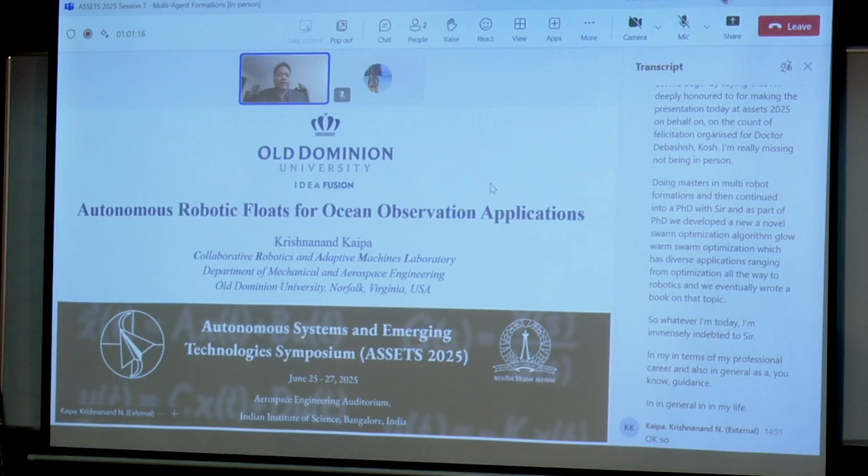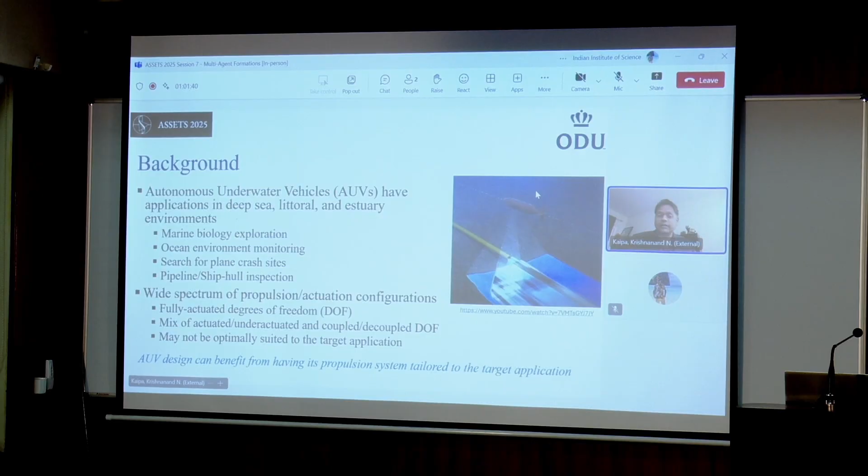Okay, so today's talk is focused on some of the recent work we did in my lab on the topic of autonomous robotic floats for applications in oceanic observation. To give some background, autonomous underwater vehicles have diverse applications ranging from deep sea, littoral to estuary environments, such as marine biology exploration, ocean environment monitoring, search for plane crash sites, pipeline and ship hull inspection tasks.

AUVs come with a wide spectrum of propulsion and actuation configurations, ranging from fully actuated degrees of freedom to a mix of actuated, underactuated, and coupled, decoupled degrees of freedom. One limitation of such complex configurations and actuators is that these traditional AUVs may not be optimally suited to the targeted application. Therefore, design of an AUV can benefit from having its propulsion system tailored to the target application.

My talk today is focused on floats, which represent a specialized class of surface and underwater vehicles deployed in different marine environments, with mobility ranging from passive drifting with ocean currents to active buoyancy-controlled vertical scaling of deep water columns. These floats come with a variety of onboard sensing to autonomously monitor and collect essential data like conductivity, temperature, turbidity, depth, dissolved gas levels, etc., with wide applications in oceanography and climate science, like methane seeps exploration, harmful algal bloom tracking, subsurface current observation, biological monitoring, etc.

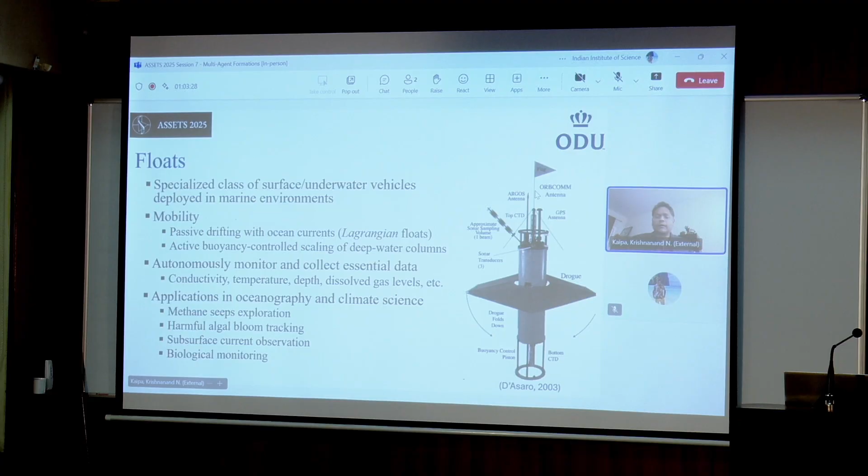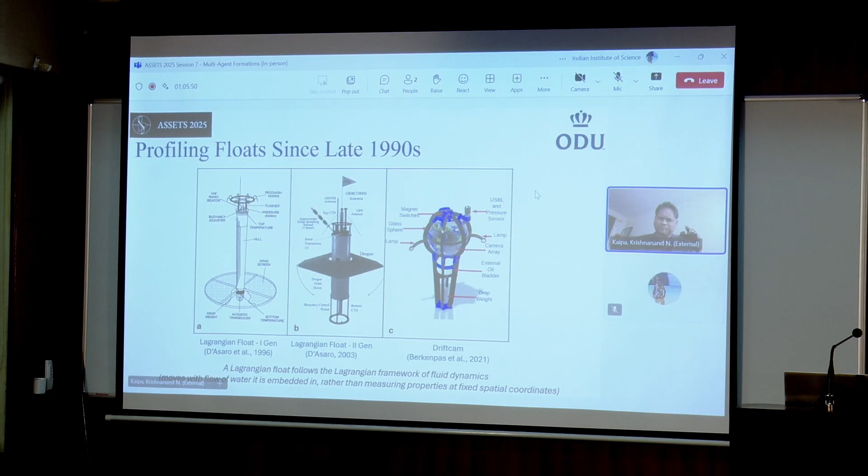In our work, we are specifically focused on the application of methane seeps exploration. Methane seeps are locations on the ocean floor where methane gas escapes from the reservoirs underneath the seabed into the surrounding water. And study of methane seeps is significant in marine science because of the impact they have on different oceanic and atmospheric processes.

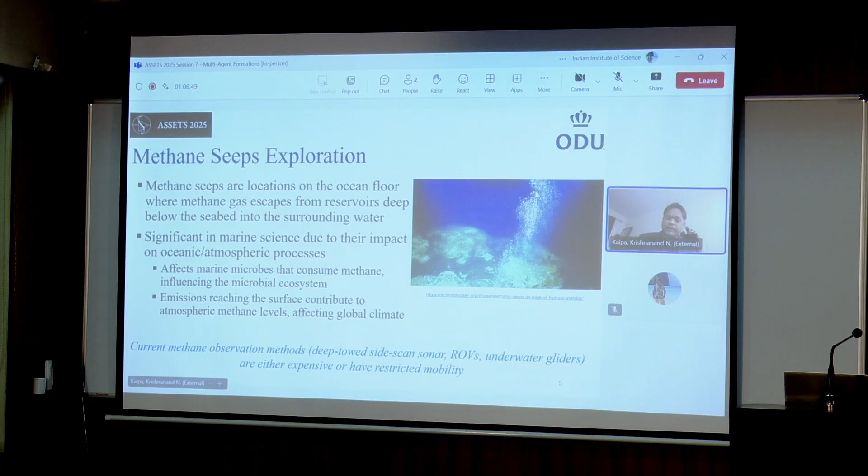For example, they affect the marine microbes that consume methane, influencing the microbial ecosystem, and any methane emissions reaching the surface contribute to the methane levels in the atmosphere, in turn affecting the global climate. Current methane observation methods use deep towed side scan sonar, ROVs, underwater gliders, which are either expensive or have restricted mobility.

And some of the requirements in the application, you can see how they impose the need for precise motion control in the vertical dimension while affording minimal to nominal motion demands in other horizontal dimensions, and also allowing for a systematic progression of prototyping iterations.

The mobility platform that we initially designed was meant to operate at shallow depths, although we envision in the near future a final deployment, which will be offshore along the US Atlantic margin, approximately 90 miles east of where we live here.

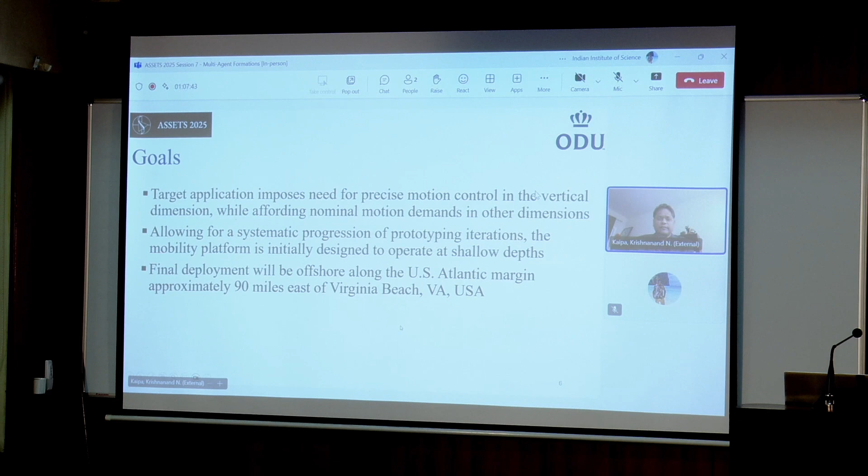In contrast to the traditional floats, you can call this more like a hybrid float because it combines features of a Lagrangian float and a quadrotor type of platform, which is achieved using 4 electric motor propeller-based thrusters that are aligned along the vertical heave axis. And it has a pressure sensor mounted on the float to obtain depth feedback, combining all these to do precise, accurate depth tracking using a PID controller that is implemented on board the float.

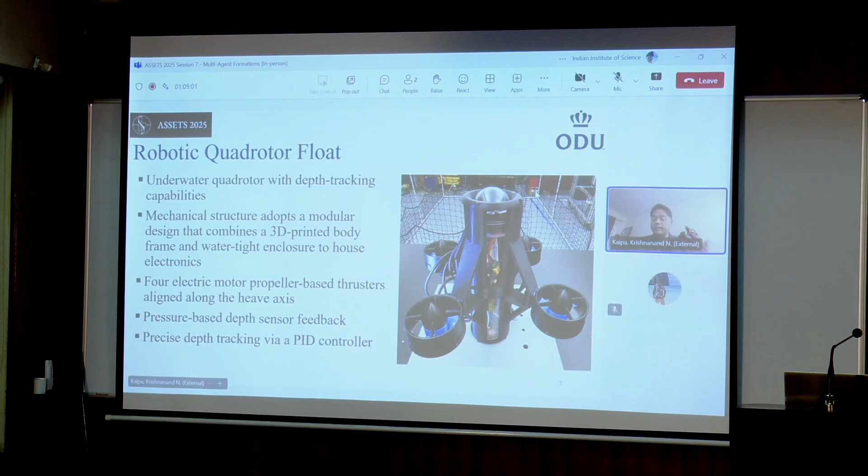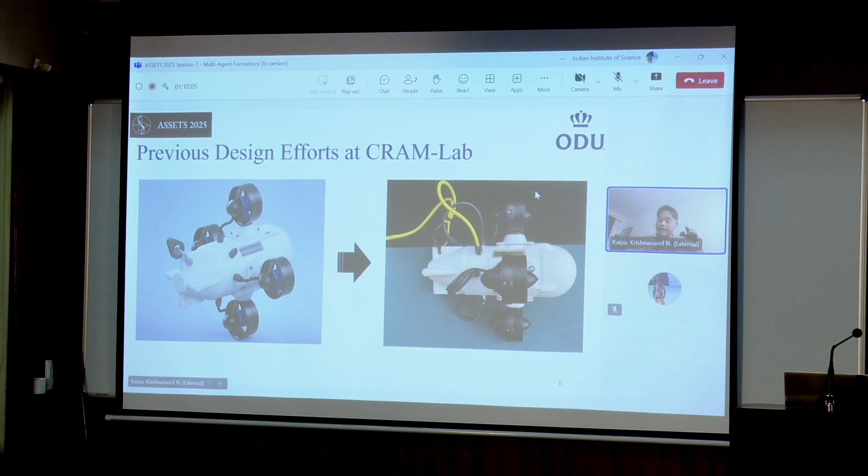So these are some of the design details, and all these designs were carried out by senior design undergraduate students as a part of a capstone project, while taking some minimal guidance in the design process.

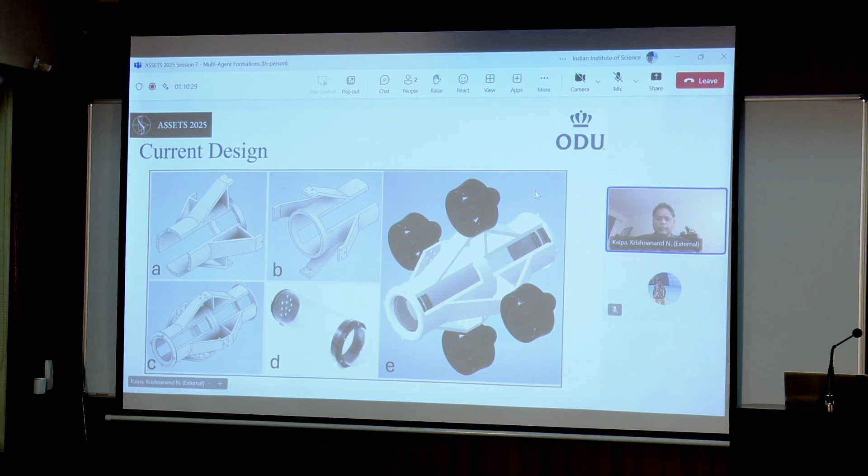So these are some hardware details. At the heart of the hardware is a Raspberry Pi, which is doing all the processing and implementing the PID controller, taking readings from the depth sensor and sending commands to all the thrusters through these ESC motor controllers. These thrusters are brushless motors, so they need dedicated speed controllers.

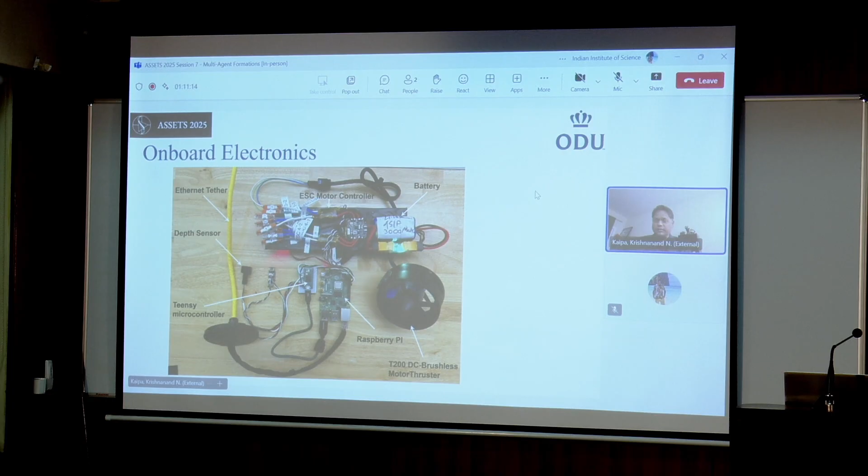And you can see a tether was going all the way. It had an onboard battery, but sending the basic commands to the bot was through a tether. And a Simulink-based coding of the PID controller was achieved and downloaded onto the Raspberry Pi. This reduced the coding challenge for mechanical engineering students.

I can go into more details later, and this also allowed real-time gathering of the data and also changing the PID parameters on the fly.

In terms of testing environments, we initially did some basic mobility testing and also tested the waterproofing in a storage tank that we bought, just filled it with water and did some mobility testing. And then we took it to the deep water pool that we have at the university and did more rigorous testing. And then we also took it to an outdoor lake for some preliminary experiments.

So we presented this work last year at the Oceans Conference, which is focused on all research related to oceans. So I'm going to play this video, which is self-explanatory, and later maybe I can touch upon certain things, certain gaps in the video. I'm going to disable that now. Okay. Sitting out of the water.

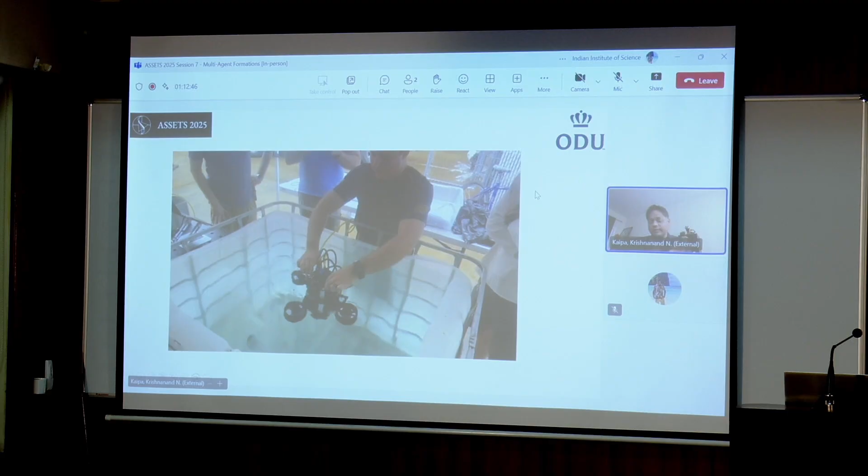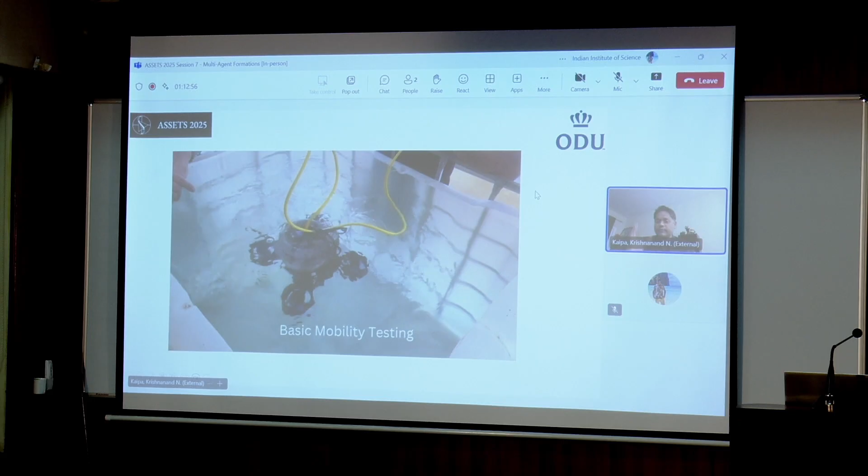As I was mentioning, these were our initial testing phase, where we had to achieve a balance between the CG and the center of buoyancy. So it had passive stability. And then just using one pressure sensor, we were able to do depth tracking. And that's the response to different step inputs and staircase inputs we were giving to the float.

And one of the students was a scuba diving instructor, so that came in handy while doing these experiments. So as you can see, we were providing a sinusoidal reference of depth, and the float was tracking such a reference signal in real time.

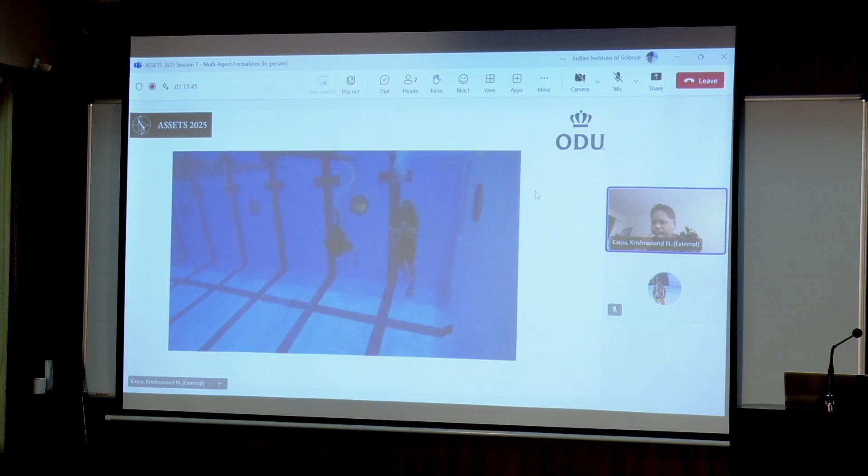The current platform has capability to go up to like 100 meters below water. And one of the requirements is to stay on the bottom of the seafloor. So we tested some kind of mock, so it was resting on the floor for up to 15 to 20 minutes. And then we made it resurface.

And you can also see how we went after a symmetric design in order to enable modeling of the platform for controller development purposes. We had some challenges in the outdoor environment. Any small currents would drift the bot horizontally. So there's a lot more work to do.

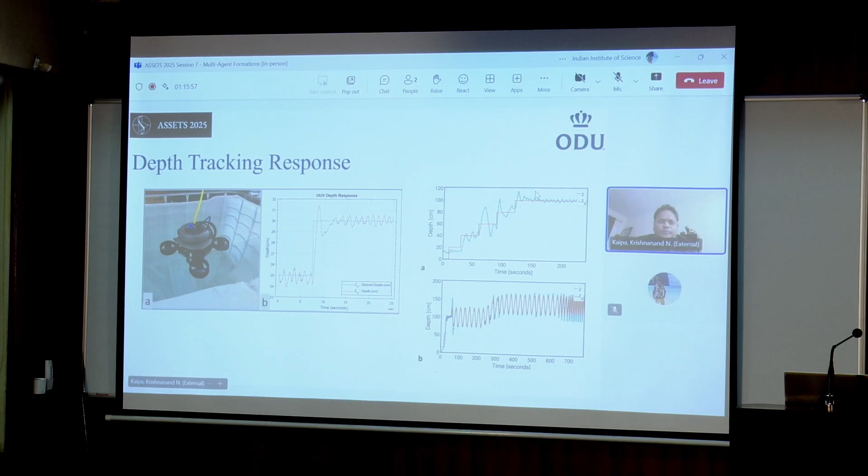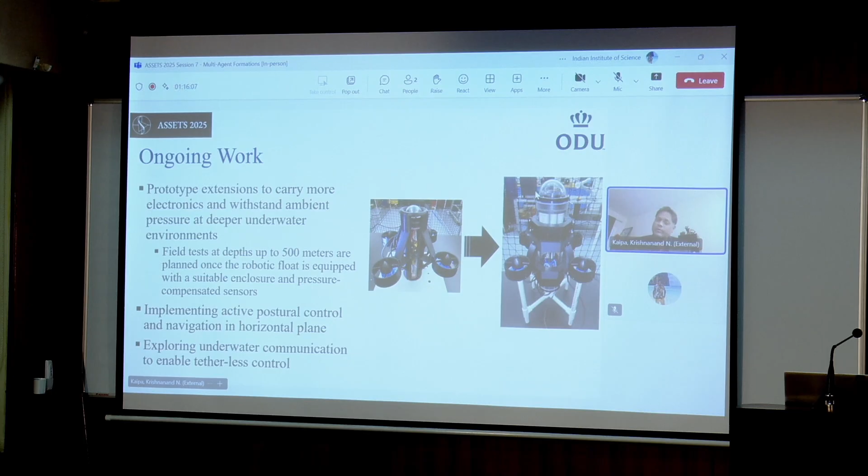As part of the ongoing work, we are currently working on extensions to the prototype to carry more hardware and also give the robot an ability to withstand ambient pressure at deeper underwater environments. Field tests at depths up to 500 meters are planned once the robot is equipped with the needed enclosure and pressure compensated sensors. We're also implementing an active postural control so we can achieve navigation in the horizontal plane.

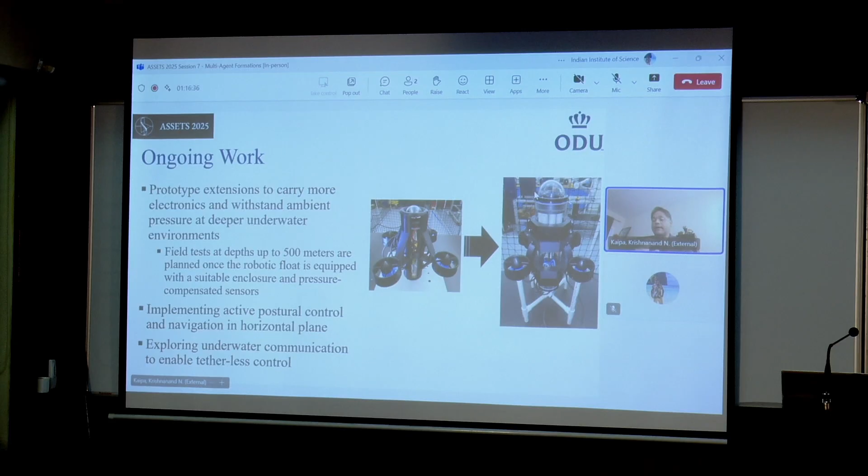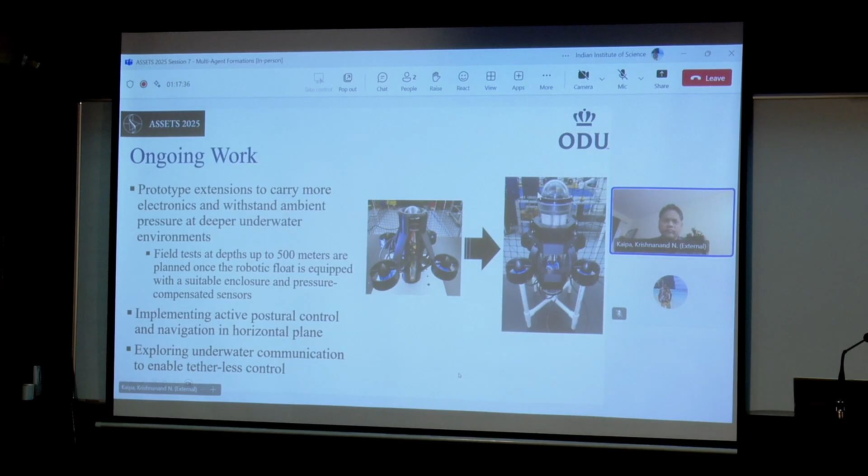It's a lot bigger, so it can carry a big sized battery and other hardware needed for different sensing applications. Currently, it doesn't have a methane measurement sensor, so that will need some modifications to the prototype. And so that's the future ahead.

As part of a collaborative project, we were thinking about ideas for what we should implement. And one main challenge in underwater environments is localization. As we all know, the underwater environment is a highly GPS denied environment. So localization of underwater sensor nodes is challenging. And hence we have to look for alternative methods. While SLAM is very developed for terrestrial and aerial applications, underwater environments are still a big challenge.

So now we can think of a combination, for example, mobile nodes like AUVs, which can use a dive and rise path planning algorithm in their motion, so they can rise to the surface, communicate with a reference node or an anchor node, and localize themselves. And as they dive back into the waters, they can propagate that location using dead reckoning until they drift away and the accuracy is not good anymore.